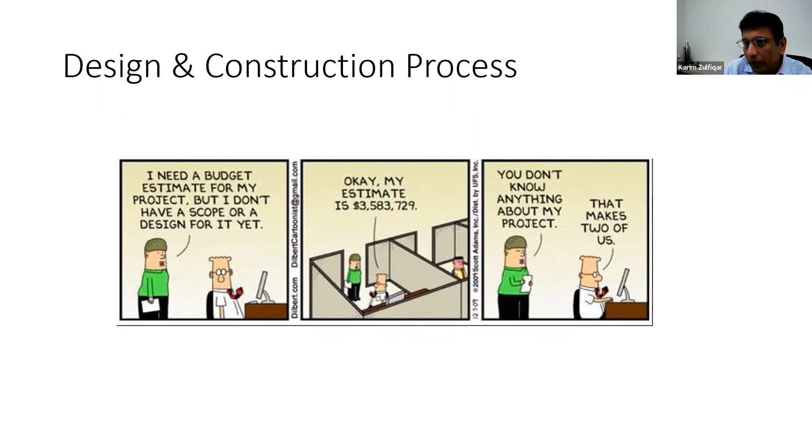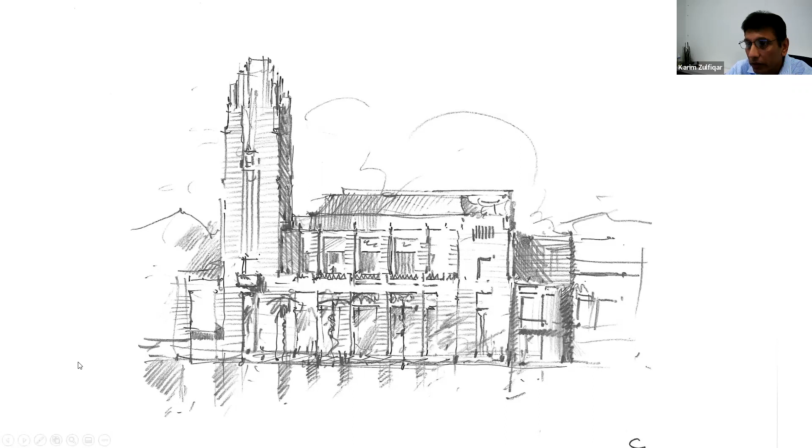So what we typically do is, at least at some level, somebody has to come up with the idea. You may be sitting with the owner and they say, hey, I need something which is this size, I want to look at this way, or this way. So for this one, you can see a sketch of a building, and of course it's very schematic. And you say, okay, how do you turn this into reality? If you go from this to this, there has to be a process. So going from the concept to the actual execution of the project, how that works.

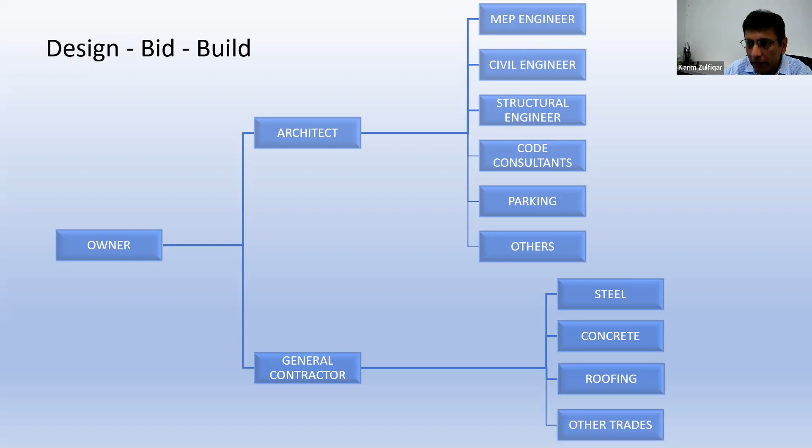Typically in our industry, in commercial construction, you will see two processes. One is what we call traditional design bid build, where typically the owner will hire an architect, and then the architect will hire a couple of engineers, code consultants, and the list goes on. And then the general contractor will have concrete, steel, roofing, and other trades, exterior walls, things like that.

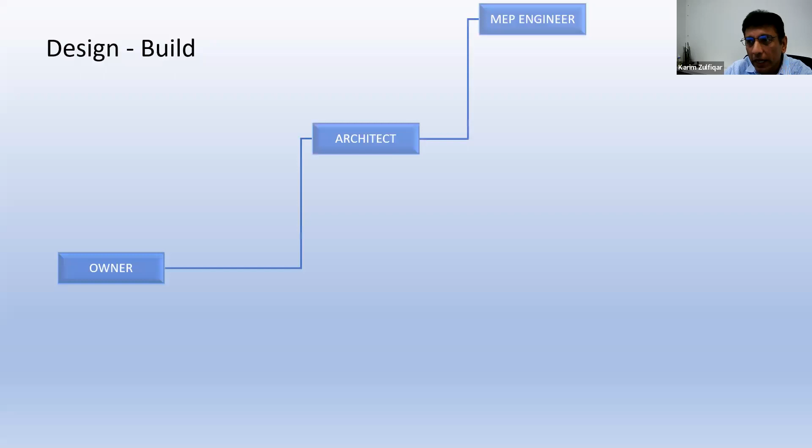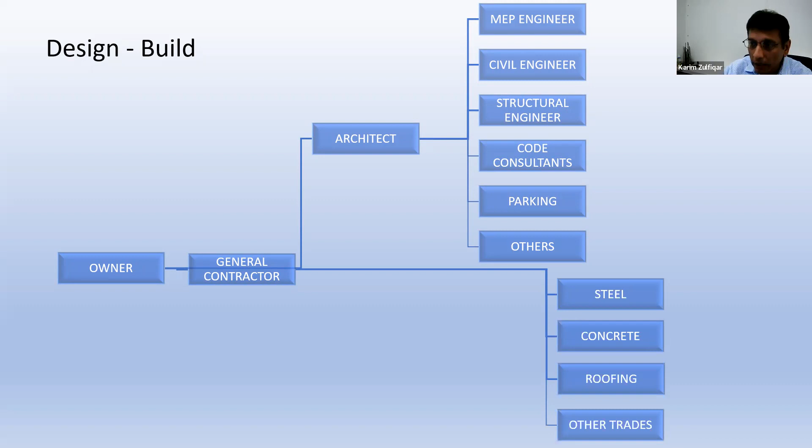The other system, which is getting more traction, is very common on the West Coast. We have done a bunch here in Houston too. Owners still have the same team members, but now the owner is only contracting through the general contractor, and all trades are still the same, but there's only one person responsible, the contracting firm. So there is no finger pointing. It doesn't work in all cases, but it works in most of the cases. So the contractor is responsible for hiring the engineers, architects, and their subconsultants or subcontractors.

So what does an architect do?

Just a joke, of course, we call them engineers without the math degree, but they do planning.

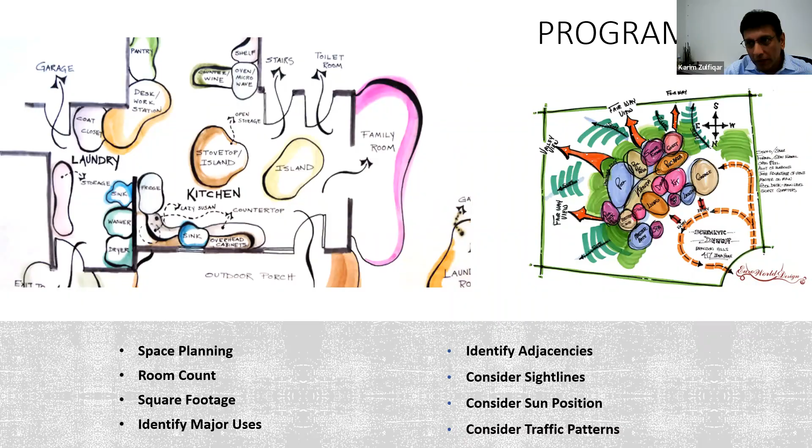So they do block diagrams. They look at the lighting, traffic patterns, what needs to be done. You can see that cartoon on the screen is kind of a residential area, but they provide those block diagrams. Then from there, they refine their drawings, create documents showing the rooms, general dimensions, and they create something conceptually.

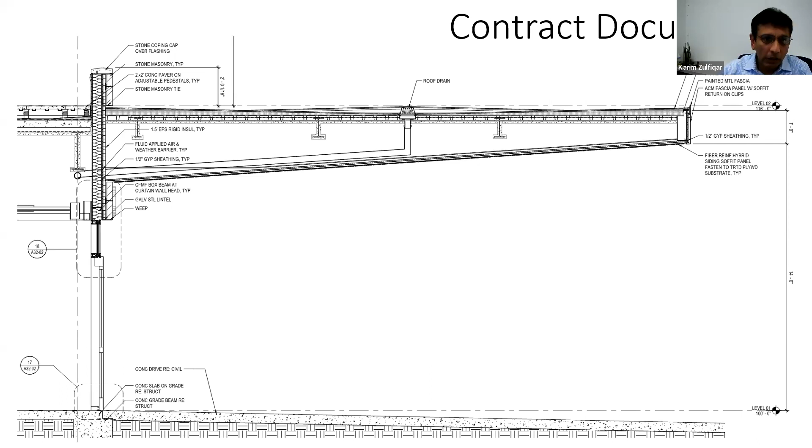I will not touch all the engineering, but of course there's mechanical, where you have to have the air conditioning, plumbing, electrical. You have to make sure that egress and the American Disability Act is followed, things like that. That's part of the architect's job, along with working with a code consultant and different engineering firms.

So if you can think of any force - gravity, earthquake, hurricane, blast, tornado, flooding - any natural disaster that you can think of, or any loads that you can think of, we have to make sure that if somebody is drawing something, it can withstand it.

And as a structural engineer, the only responsibility we have is public safety. So when we put our stamp on the drawing, the only thing we are responsible for is making sure that the building is safe. Whether the glass is broken during a major hurricane, or the owner wants you to change something because it's costing more, but it will compromise the safety of the folks, we don't do it. Technically, we have to report that.

So that's why we, as an engineering profession, are not fiduciaries, because we cannot - our interest is not the client. We don't hold the client's interest first. Public safety is the number one priority. So if the client fires us, that's fine. It doesn't happen often, but that's a possibility.

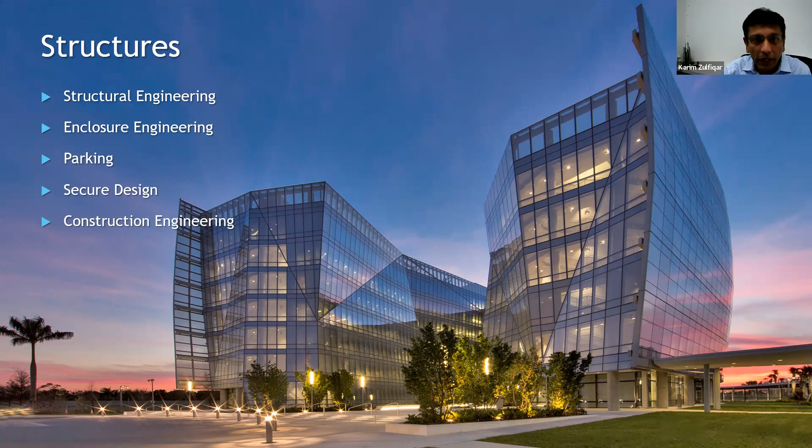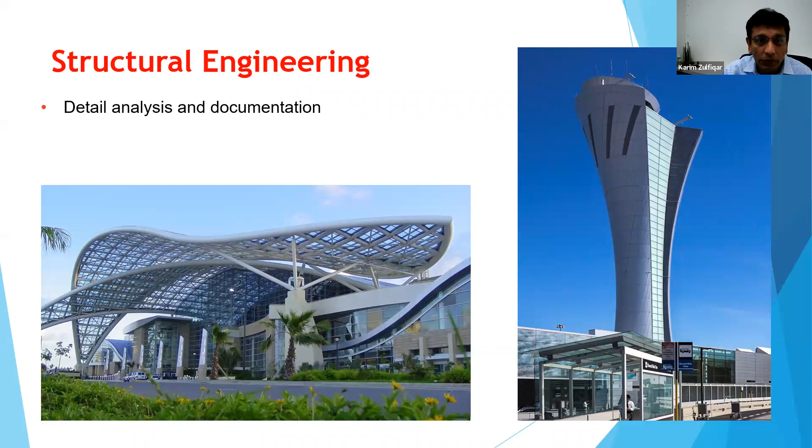So the idea is that you have to make sure it's standing, and the reason it's critical is because you don't want to have an air traffic control tower down after a seismic event, because that's where you need it to be functional - people are still in the building 24/7. So you have to make sure it's safe for the occupants.

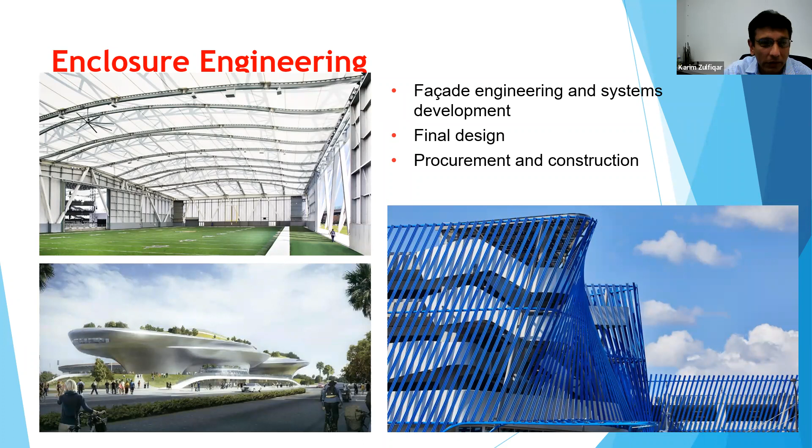We also do parking garages, so we have a group that does the parking design - aisles, all the controls and everything that's done. I don't want to go over the whole list, but this is part of the structure practice here.

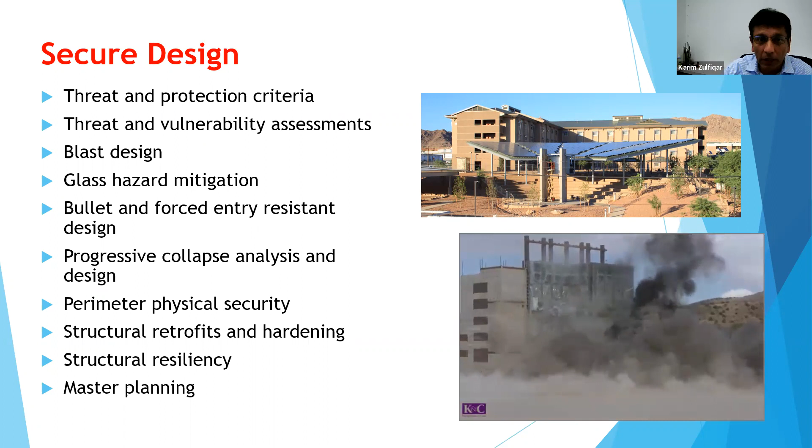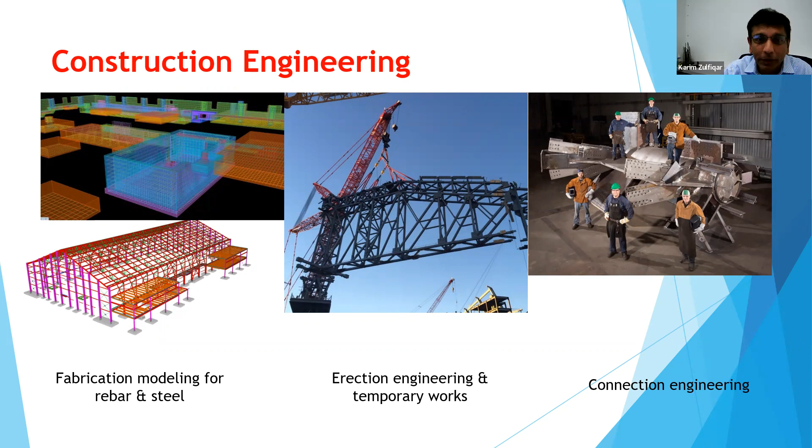We also do construction engineering, working with the contractor who builds that. The right-hand picture shows the connection of a truss in one of the stadiums we designed. Those connections can be huge and complicated, showing the scale and complexity in some of the stadiums you see these days. Everybody wants that—Dallas Cowboys was the extreme. Minute Maid was one we did and we thought that was pretty cool. Now it's like nothing; people keep stretching more and more.

Then we have the diagnostic practice. Once you build the structure, there's going to be maintenance—no building is designed to last forever, every building needs maintenance, and in some places you will have problems. We go out and do investigative work, do the repairs, and produce documents showing how to repair that, working with a contractor. We have a group that works on that.

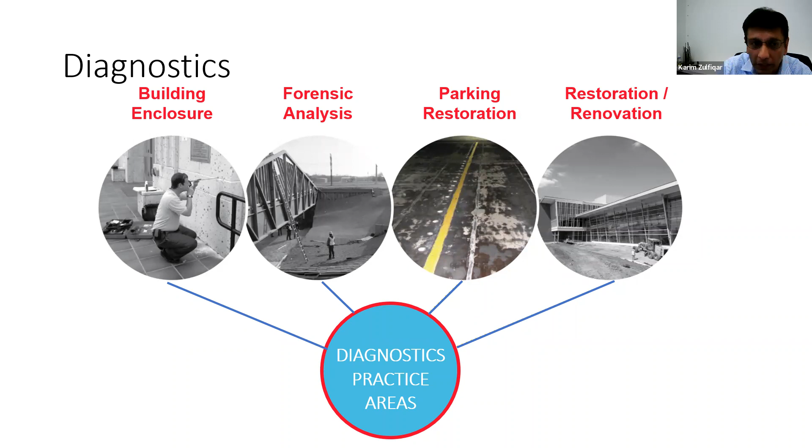We also support litigation efforts. So if somebody has defaulted on construction, we support the litigation efforts as well.

Where do we work? We work pretty much all over North America, South America, portions of Australia, the Middle East, and some in Europe. We have offices that now cover some of our international locations.

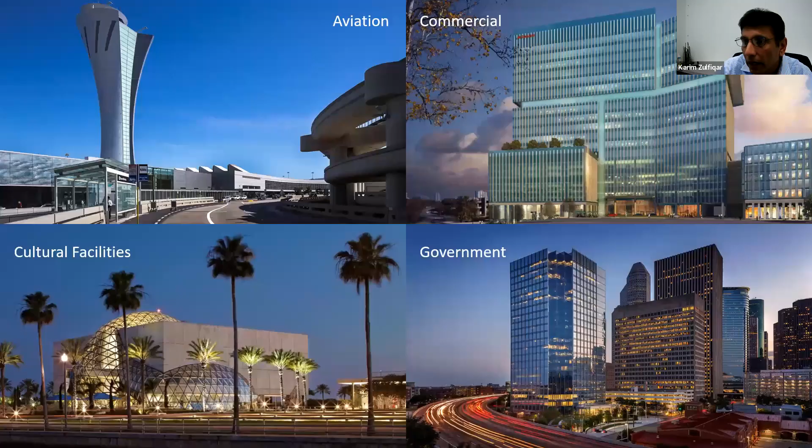What type of projects do we do? The top one is aviation, commercial, cultural facility, government projects—this is one of the projects I'll probably show at the end if there's time. Also healthcare, education, hospitality. We don't encourage gambling, but we design it if the client asks us to. We don't take any liability if you leave your credit card there.

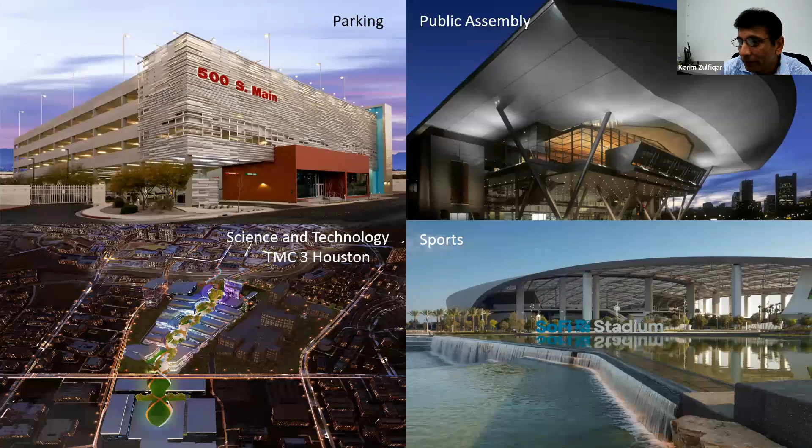Mixed use, parking garages, SoFi Stadium—you guys have seen that at the Super Bowl that just completed. That's one of the most expensive stadiums being built. It's getting more and more crazy these days as everybody's expectations get higher.

The one on the bottom left is the TMC3 that Caveh mentioned. This is a rendering—every single building is a different building. We have 3 buildings under construction right now, with the rest coming up, so we'll see which other projects we're able to do on that site. It's a massive site that's going to be a research hub and a major boost for Houston.

This is the structure model—that's what we do, and that's what gets us excited. We go from foundation all the way to the top. You don't normally see that because it's usually covered by exterior glass and ceiling, so it's usually only during construction that you see that.

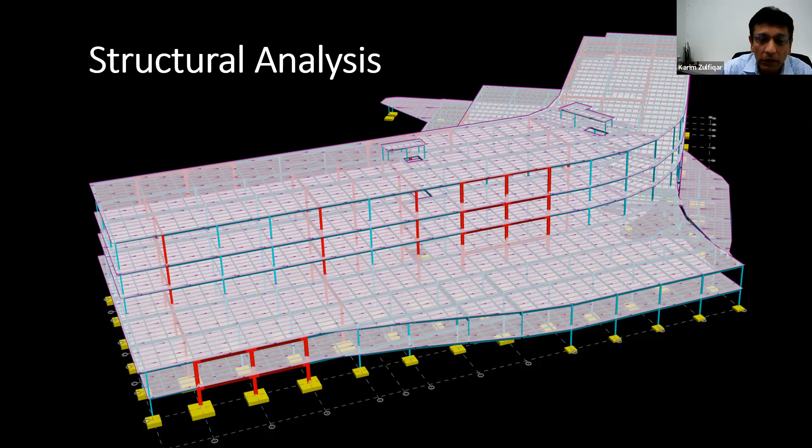We analyze the structure models—this is the Women and Children's Hospital in Phoenix, one of my projects just completed for Mercy Gilbert Hospital System. This one was in a moderate seismic zone, different from Houston, but this is just the concept of what we design.

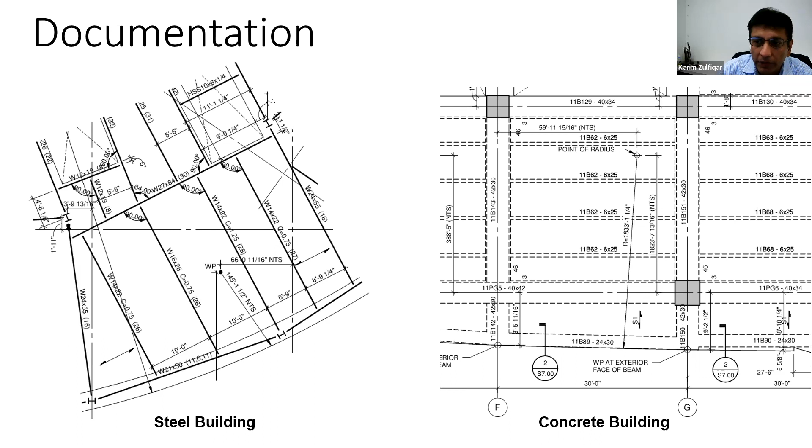We take this and produce drawings—right-hand side is the concrete, left-hand side is the steel building. We produce documents, and most people don't think about it, but every single mix of concrete is designed, with different ingredients for different commercial construction, so you get different varieties of concrete based on what you specify and what the building needs.

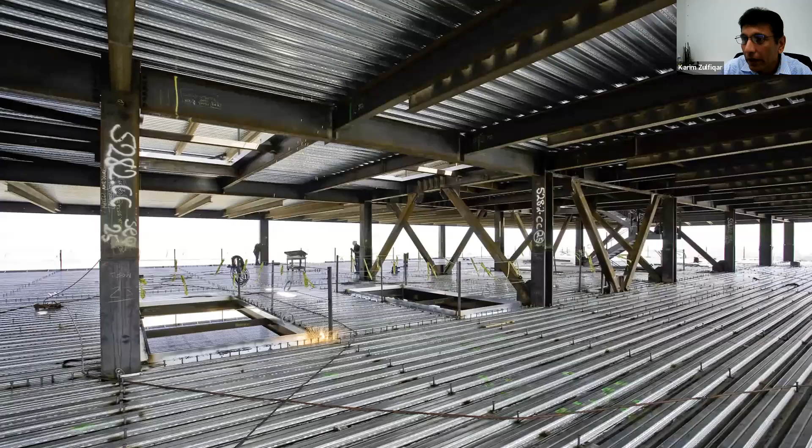Same on the right-hand side: every single rebar is designed, the spacing is designed, and that's what we do. On steel construction, these members—including connections, different braces, floors—every single bolt has to be designed to make sure it meets building code requirements and the required forces.

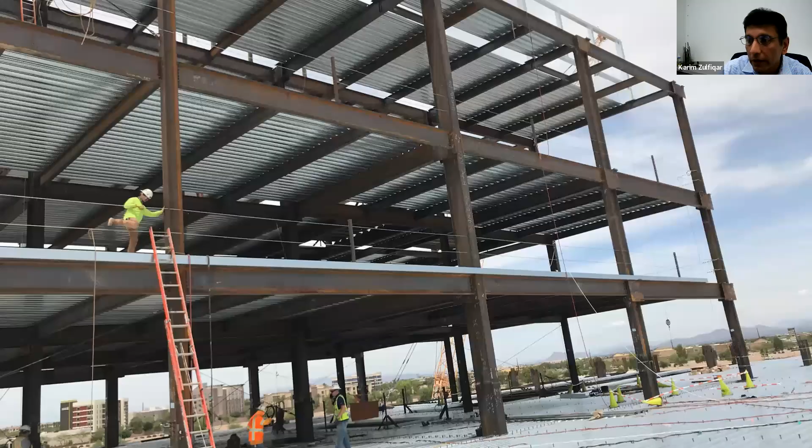So this is just a kind of a general overview of what structural engineering is and what type of work we do. So I will stop, pause for a minute and ask for a question.

I had a quick question. How do you normally get your projects? Or how does Walter P. Moore get projects? So we are 90 years old.

I was not here when we opened the office, but mostly it's based on relationship. We are one of these very fortunate firms that have these existing relationships, like Texas Medical Center. Our first project there was in the 1940s, and we are still there. If you drive in Texas Medical Center, more than 90% of the buildings are designed by us.

Same with major stadiums. The first retractable roof in Houston was the Houston Minute Maid Park. At that time it was Enron Field. When I was hired, I toured the building as part of the interview process. Now we have done so many retractable roofs.

I think it's based on the relationship and the expertise that we have in-house. One thing I always tell people is that there are people who will either under-promise and over-deliver, or over-promise and under-deliver. We don't do that. We just promise what we say we'll do. That's what gives us an edge to get the project, because it's about becoming a trusted advisor to clients, and we get most of our work from repeat clients.

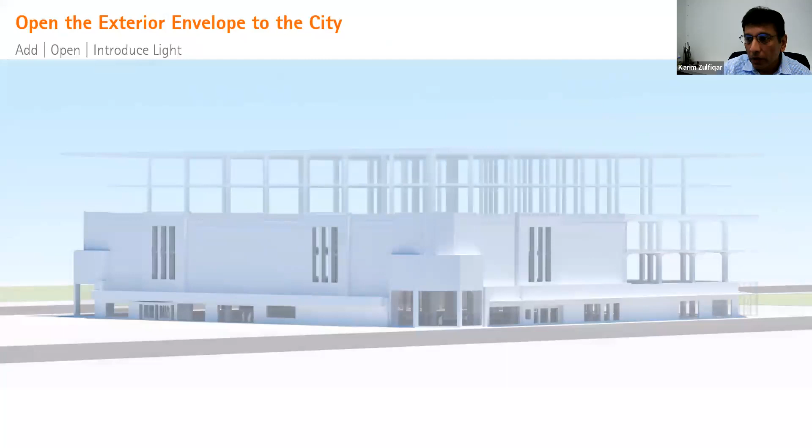So you try to work with the existing structure, you open it up as much as you can, and then you add structure. This is what the building model looked like, and it's very close to what we saw when we were there. So that's the first part—you create those physical building models and see how it works.

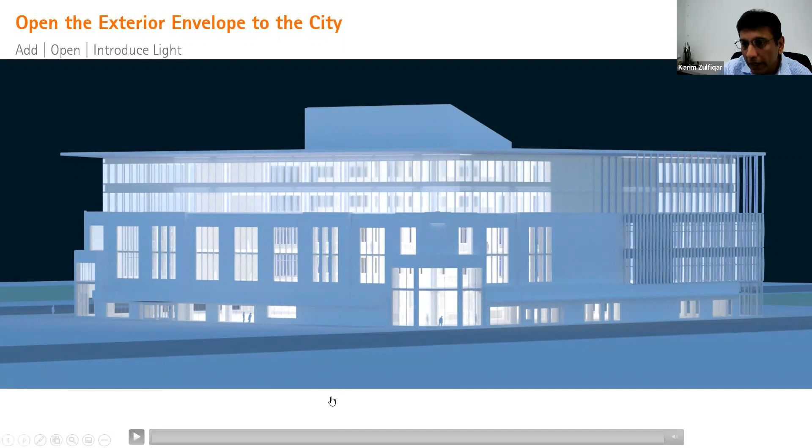This is during construction, but you can see some of the facade members used the same concept from their 1960s theme. They took some of these perforated, twisted metal panels and added them to the building—so how do you bring light to the building, which is a dungeon, right?

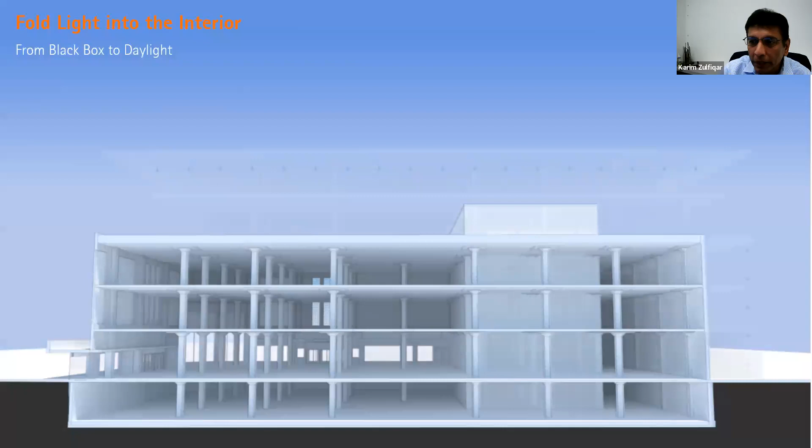So you see this one again, this is the animation. You have to cut the structure and build a light well so the building can get the light, so the building doesn't look like a dungeon. It's open, it's welcoming.

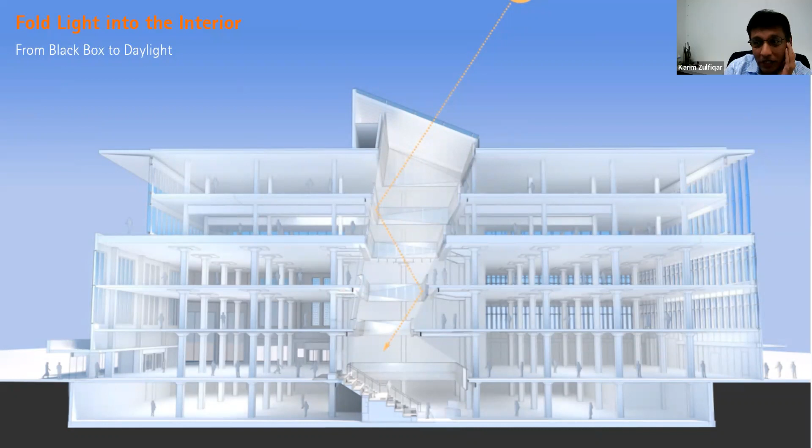That's where we created the structure, and it's a 1930s structure, so it's an old building, and modifying it was challenging. But you create that light well, and at the bottom you see those steps—those were the ones where we had our class. If you remember, we were in the conference room and everybody was sitting on these steps for one of our exercises.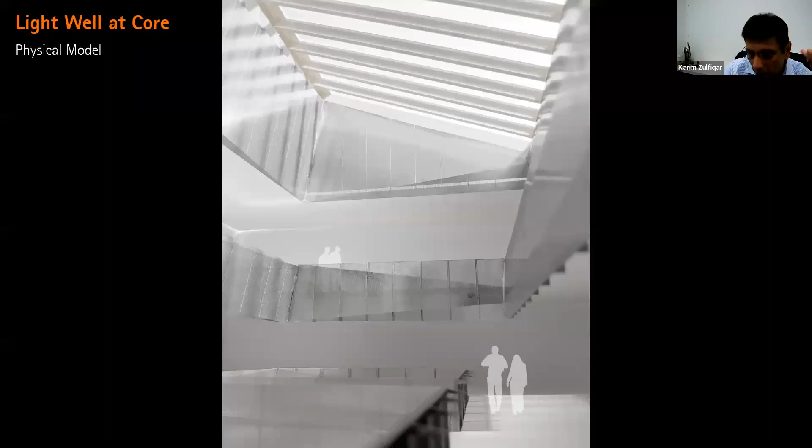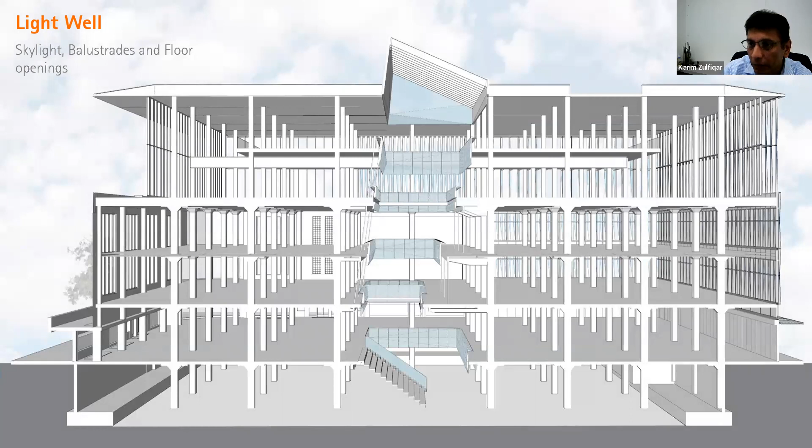We created these physical models just to see how much light is too much, taking that into consideration to make sure we knew what we were doing and weren't creating something adverse—especially in Houston weather, you don't want to create something where instead of lighting, you're getting heat. So again, same concept with the skylight, a new skylight that was installed on top.

In this picture, everything that's blue is the new structure. We repurposed the majority of the structure, but we had to cut some structure. You see some of these columns right here that we had to add, and you can see in the actual images how we had to add this to make it part of the design, but also to support the structure.

The other challenge was, all the blue—the top is all steel, the bottom is all concrete—but you have to make sure that this blue and this gray all look the same, even though this part was done in the 1930s and this part in 2020. It has to look like the same, because you want to create the same space. You don't want this to look like a patch job with everything exposed. So that was part of the challenge.

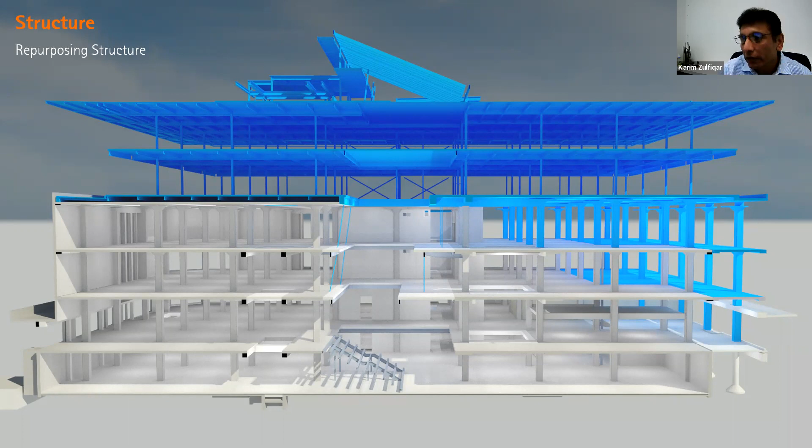So why didn't we demo and build a new one? We saved 3,100 tons of CO2—that was one of the reasons. You repurpose a building because you can make an impact on the environment. I can share more on this if people are interested, but this is why we tried to repurpose a building instead of building a new one.

And it creates character. ION is famous not because it's a new building—ION is famous because it's an old Sears building.

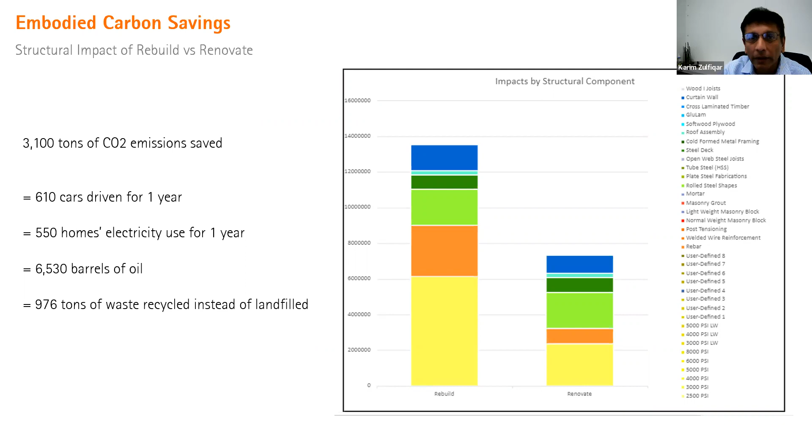So you have to cut the structure, create something. We go through every single corner to make sure we don't miss anything, because it has to stand the forces needed for the new building code and life safety. From the 1930s to now, the building codes changed a lot.

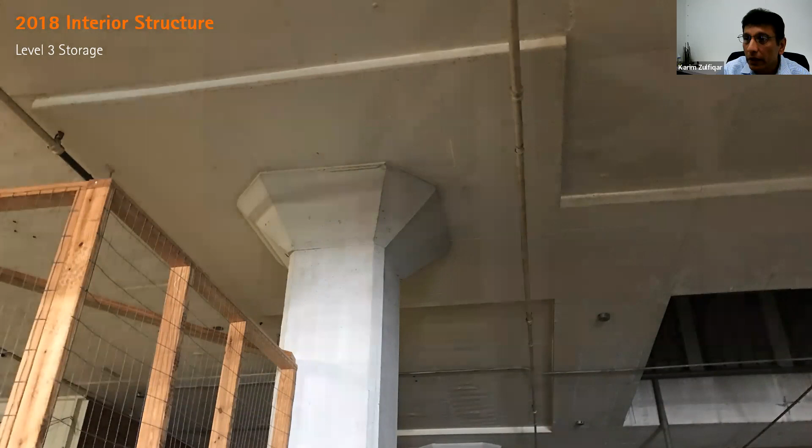So when we are looking at the stuff, we will see the cracking. Most of the time people will miss that, but we actually go there and look for issues. And when we removed the skin, this was the building.

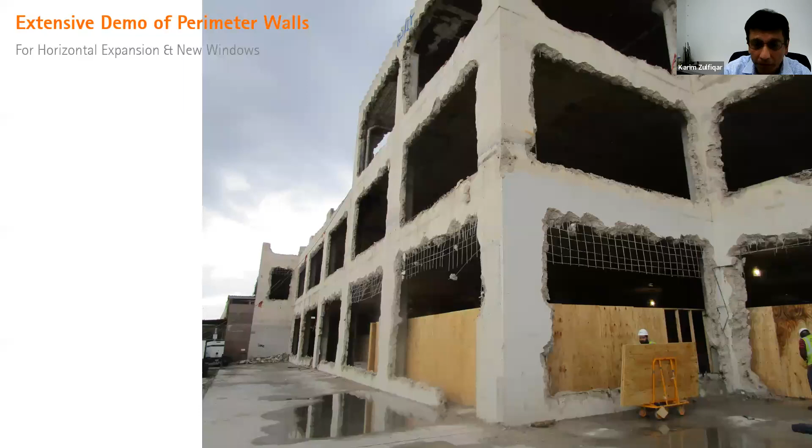You can see that it was a challenging part to make that work. We always tell people, if you can repurpose that, it probably costs about the same, but you can make an impact. And that's what Rice decided to do.

So we take the old drawings from the 1930s. And of course, these buildings, we are adding additional floors, so we have to strengthen the building to make sure it can not only withstand new code, but also support building on top of the existing building. We don't want the foundation sinking into the ground.

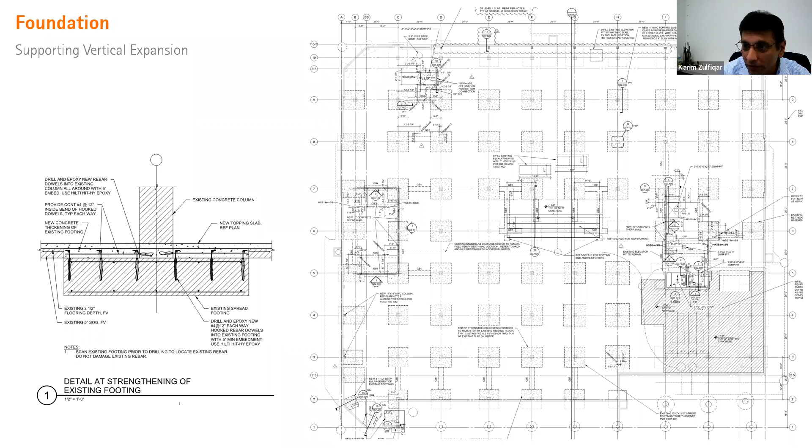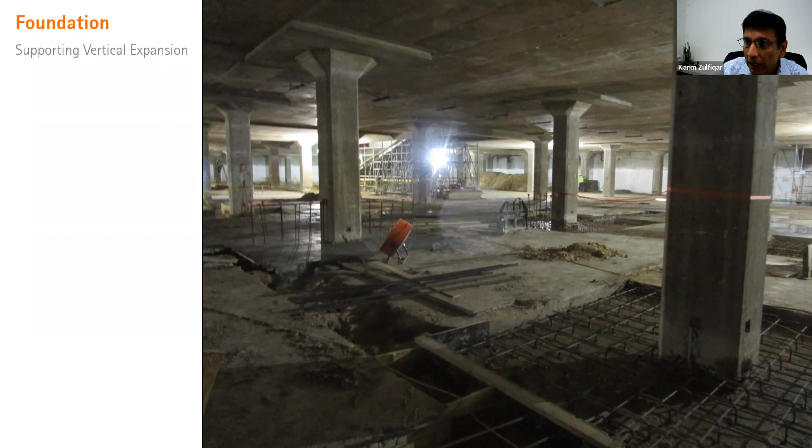So we look at these, we design the details, and then the construction happens. This is everything that was done. Every foundation was checked, every column was checked for the existing building to make sure it's safe.

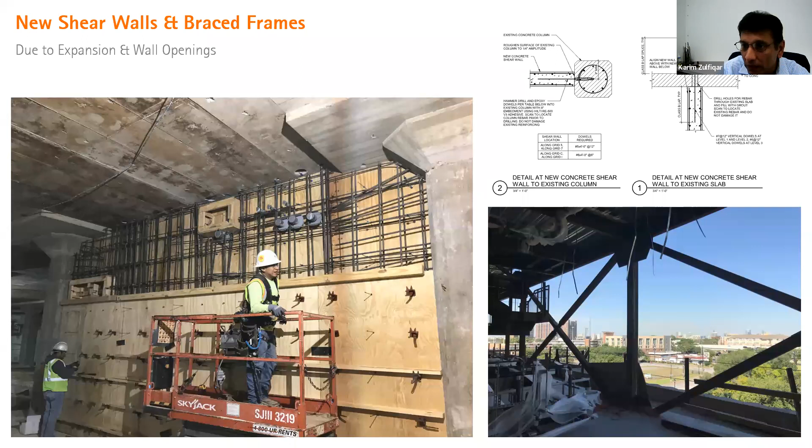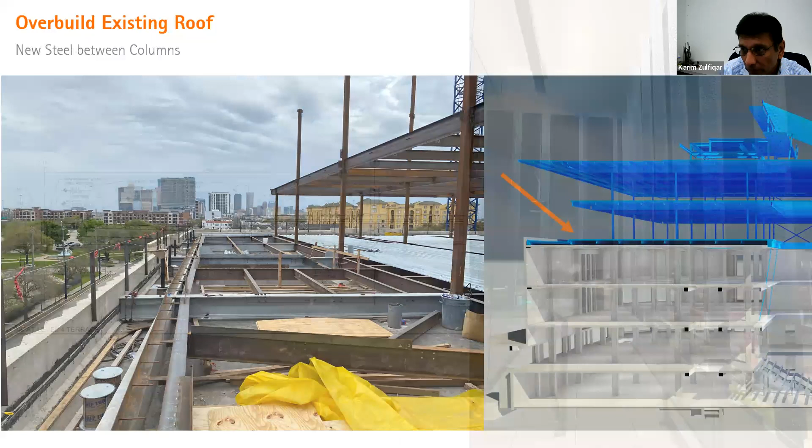And then some of these walkways, just some of the details we have to go through to make it work. This is what I was talking about before, the new portion, and on the left-hand side you see the existing building.

When you walk in that space, every concrete is exposed, right? So you have to make sure that the old and the new look about the same, so people don't see it as a patch. So it was done, of course we have to match the concrete texture to make sure it works.

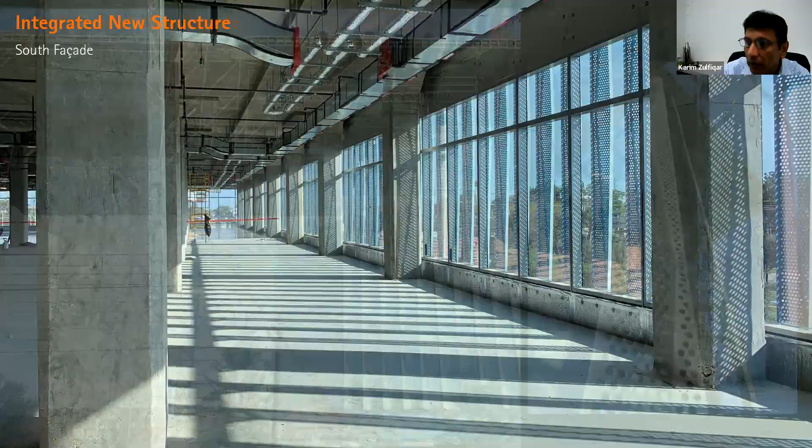This is during construction, they were installing the metal panels. This is that huge skylight that brings the light. Once we cut the structure, this is the skylight that was installed. You can see it's installed in a way that it brings the light, but not necessarily direct sun to the space below.

So that's why all these models were created, to make sure that you look at not only the light, but also the comfort level, so that people can use the space.

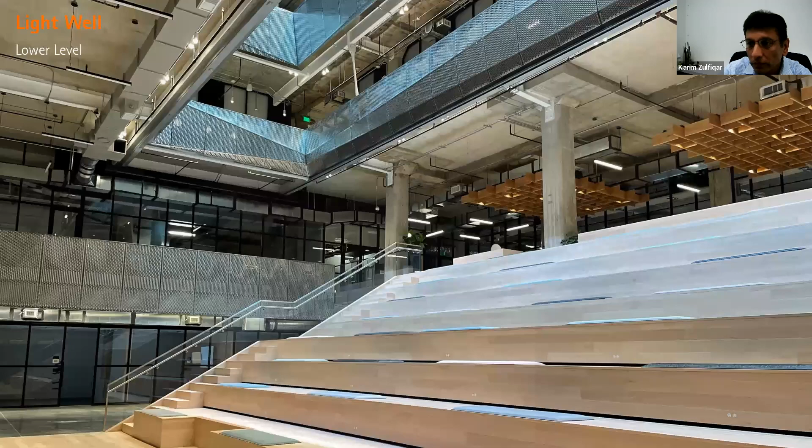So this is what it looks like. These are the columns. You can see, if you remember, these are the rods. These are the columns that support the edge, because we cut the center of the structure. But those were the support needed to make that building work.

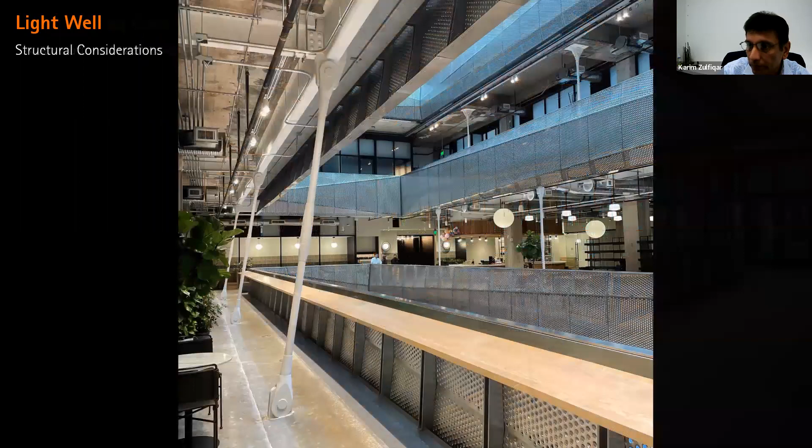Another view, again from the sides. So going from a 1930s building to this building, you can build this for about the same cost as a new building, but the reason it's famous is because it's an old Sears building. People love to use that building because it was repurposed.

So any question on that one?

Yeah, I have a question. Sorry for chiming in late, but are there any cost savings, or what is the comparison between this and starting from scratch?

I mean, you can save cost, because it depends on how good of a condition the existing building is. There were some challenges, but not everything was bad. You saw the pictures. There's a portion which requires significant strengthening and some foundation work, but you're still repurposing a bunch of stuff, so there is some cost saving.

But you have to look at the total cost, because not only is material cost a factor, but you're also saving a lot of schedule time, because you're not building half of the building. It's already there. So building versus strengthening, yeah, it's a time saving too.

So cost, environmental impact, initial cost, and then this space they can lease for a higher price. There's a lot of spaces available in downtown now, but if space is available in Ion, that's usually the first choice, just because of the nature of that building.

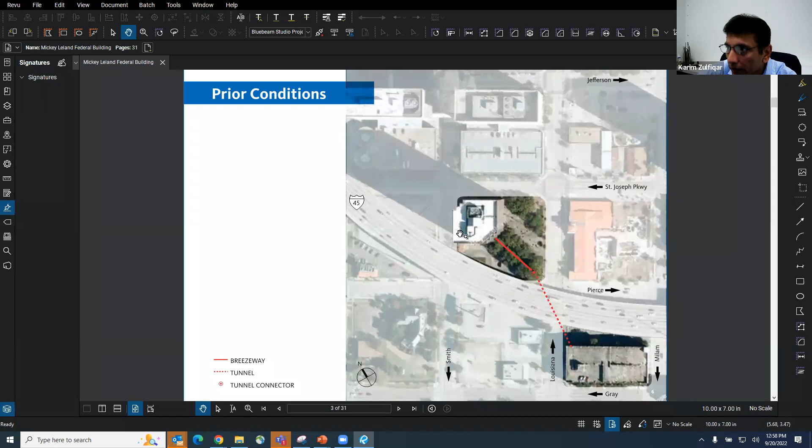And this is just the PDF. So this, if you guys remember, is Pierce Elevated. This is going to Dallas, I-45 North through downtown. The federal building is on one side, the parking garage on the other side. There's an underground tunnel, and then you come up and go through the breezeway. This is the building where the passport office, IRS, and everybody have their offices. So this is what the building looked like, a 1983 office building.

It was a precast construction, typical office building, nothing special about it. But the federal government bought that in 1986. And like I said, after the 1995 Oklahoma bombing, a lot of things have changed. So they decided in the early 2000s to modernize this building to make sure it can resist blast loading, resist wind loads, meet the new building code requirements, and look nice.

So they did a couple of different iterations, but having an '83 building, even in this case, was not easy to renovate because of how it was constructed. Some of the specifics I will skip because it's a federal building and we have to sign the NDA, so I don't want to end up in jail after this presentation. So I'll keep that vague, apologies in advance.

But this was not designed for modification, yet the modification the government wanted—we still wanted to give them something that's state of the art, still meets the security requirement, and still meets the building code.

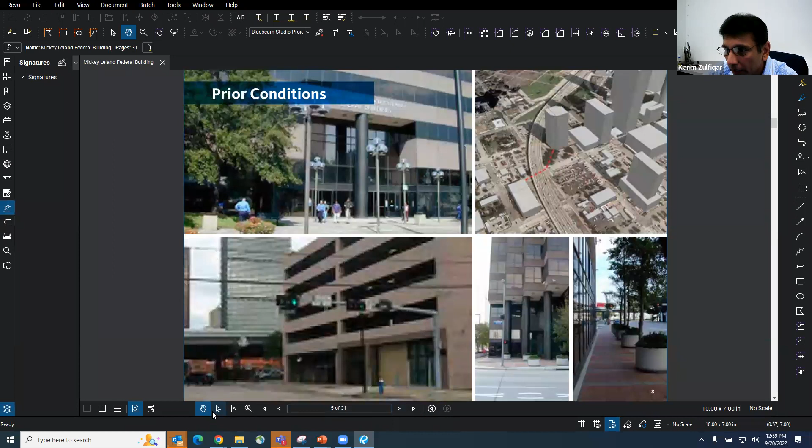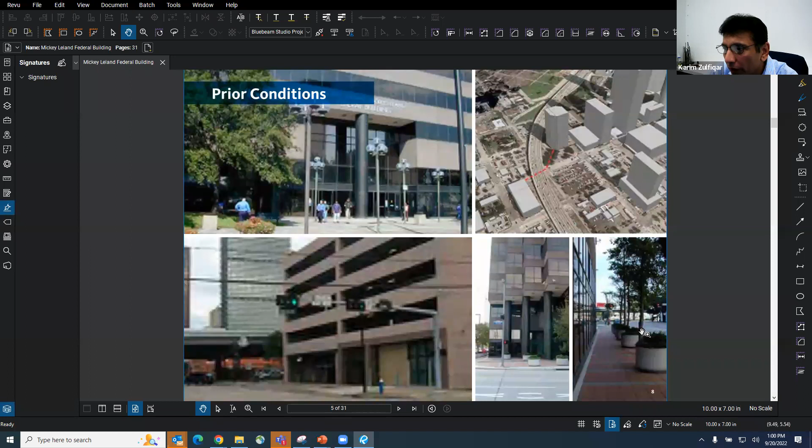So let's see, sorry, I thought it was a presentation. Let's go back. So this was the building before. Again, this is the garage schematic diagram, this is the garage right here. This was the lobby, a very small lobby space. People will—it looked crammed if anybody here went to the passport office before. This is one of the highly dense buildings, it has about 1,100 occupants. And the idea was that when we do this renovation, we were not supposed to relocate any of the tenants. They can still stay in the building, so that was the challenging part.

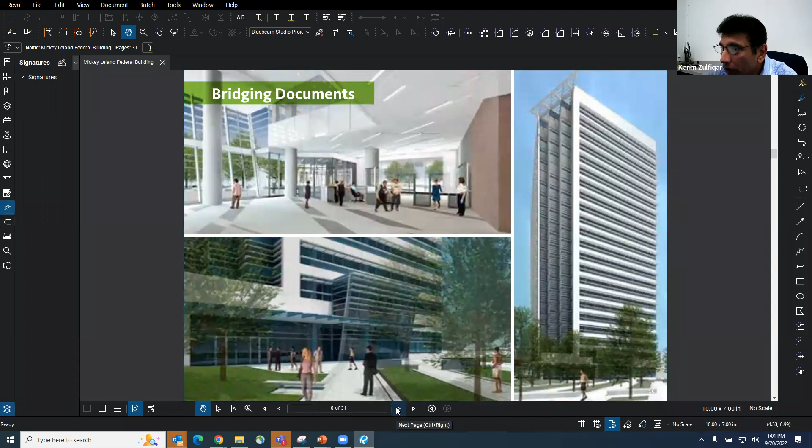So of course it needs to be energy efficient in addition to all this stuff, and the federal government wanted to change that building to this building. Of course we told them we are engineers, not magicians. So we told them this exact thing is not possible, but we can give you something slightly better than what you have. So we took that old building and proposed something like this.

This was with Gensler Architect in Houston. So we said, okay, this is the underground tunnel, people come in this nice glass breezeway, there's a green roof on top, you will have new cladding, and we will add security so it's protected against the threats the government wants to avoid. And you can have something like this. So they agreed and we did the analysis.

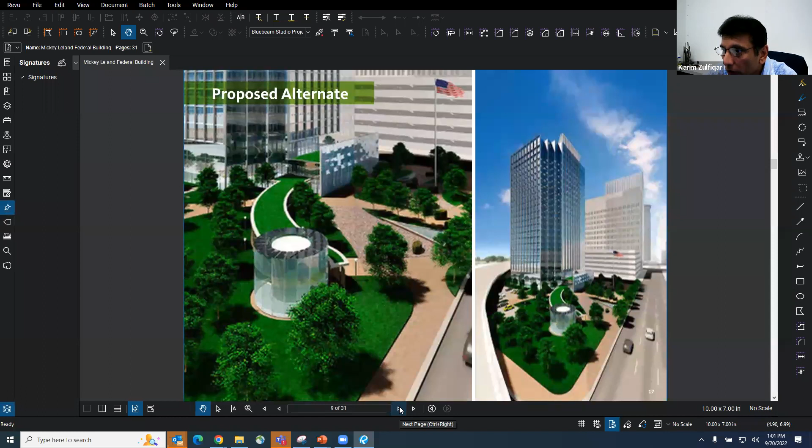The first thing was, can this building get this modification? And that's where the structural engineering part came in. So we worked with the design team, we created that concept model. This was the original footprint of the building, and we added a lobby space.

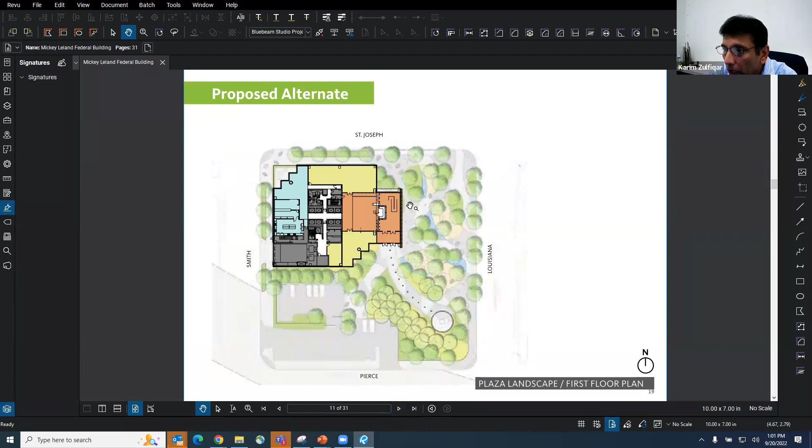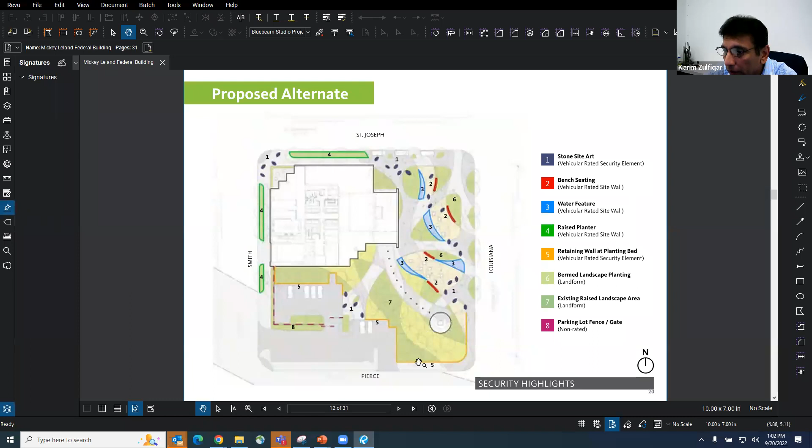Some of these areas are part of the green space, and I'll show you the actual picture, not just a rendering. These are the security barriers we added around the building, without going into specifics, to tackle different threat levels that the federal government required us to secure that building.

So this is again some rendering. This is what we propose as a lobby space in the rendering. So this was the structure part.

The building was not actually straight, it was slightly tilted. It was safe, I mean it's exaggerated, but we had to build a new skin which is straight on a building that was not straight.

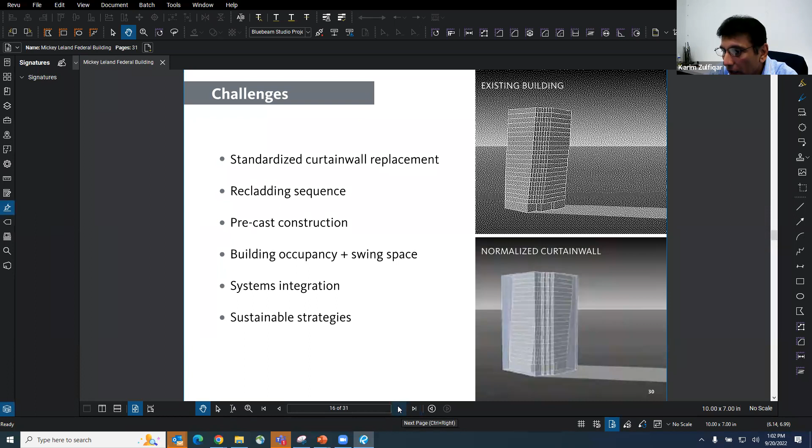This is the structural engineering part, which was the complicated one: making the building take the blast loading, take the new wind loads, and still meet the new building codes, built in '83 with no provisions or modification. So we came up with details.

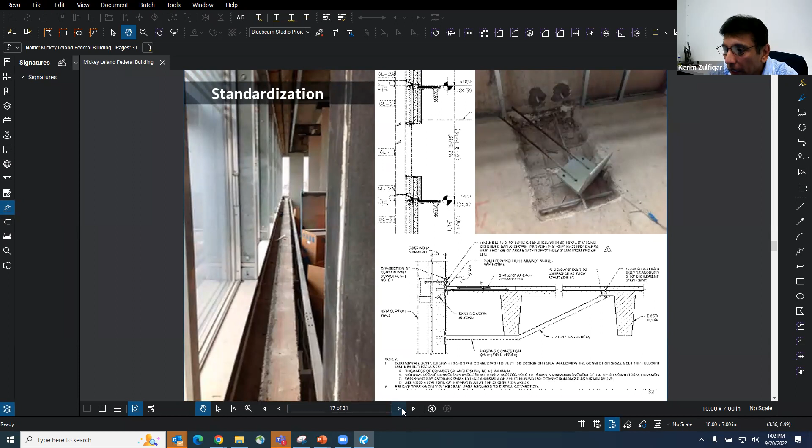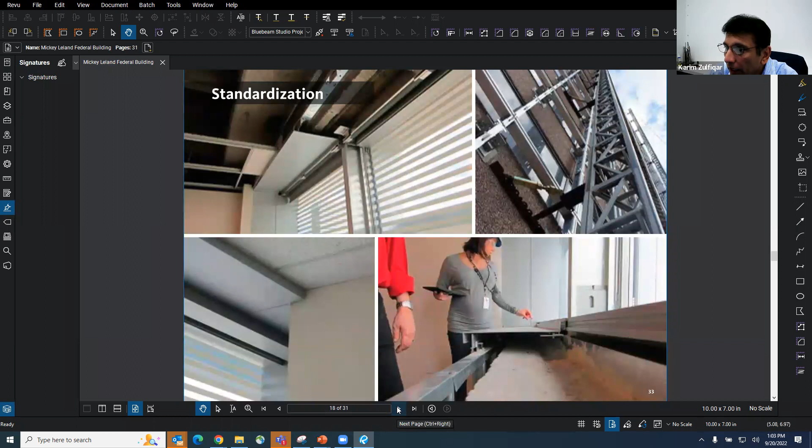This is one of our engineers on site, and I was there because it's downtown, so I was there multiple times during construction, because especially this corner is the reason I have gray hair. It took most of the time because it was complicated to design, since the nature of the building wasn't there to modify, but we were able to design that.

Again, some of these details required us to chip existing portions of the concrete in a way that we don't impact the occupants within the building, because this was a fully occupied building during construction.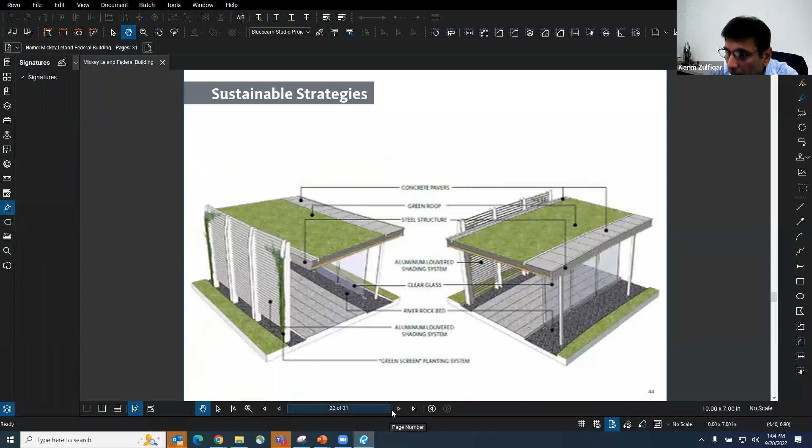So this is what the building looks like today. If you drive downtown, you'll see that on the corner. Again, state-of-the-art building skin, designed to resist the threat level that was given to us.

And these landscape features are part of the security barrier, to reduce or minimize that threat level that the federal government wanted to achieve.

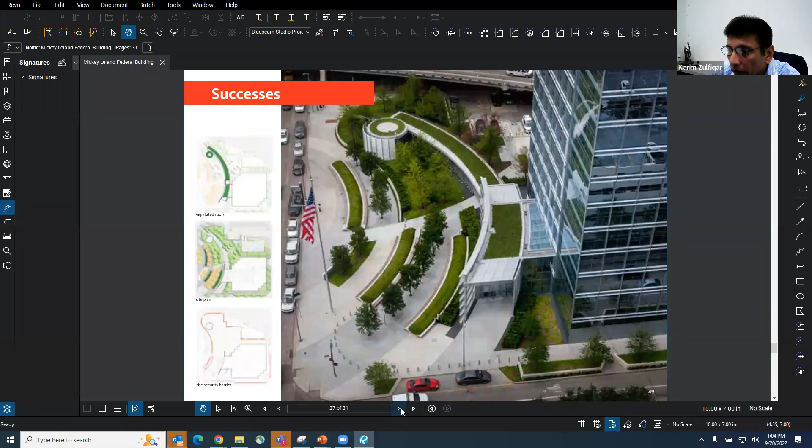And across from there in the garage, we added solar panels, and the solar panel wiring traveled through the tunnel. The building gets part of its electricity from these solar panels.

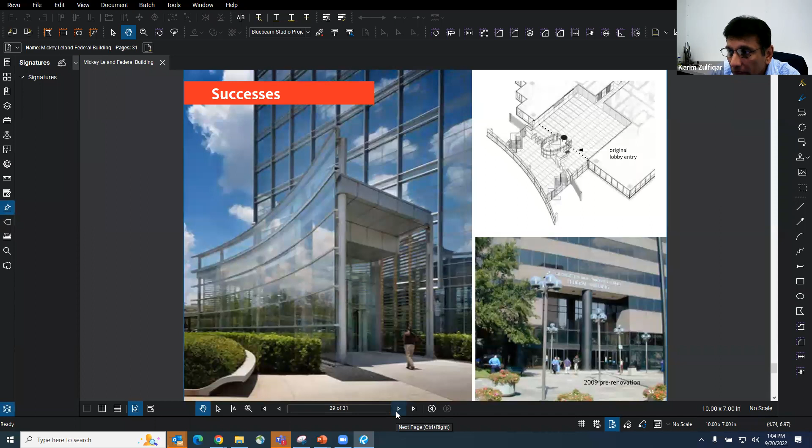This is the extended lobby space, and you can see the before and after picture. This is the breezeway, again creating something welcoming for people coming from the tunnel. And this is what the lobby looks like.

This wall right here involved a lot of designers, especially minority architects, who came up with different designs for the lobby space. So this is what the finished lobby looks like.

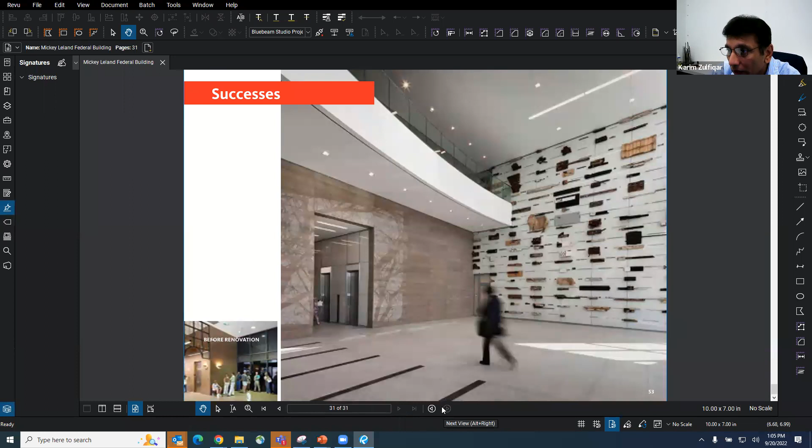Sorry, this was a very fast pace because I know we're out of time, but any questions on this one?

No, Karim, I was just making the comment in the chat box that it's nice that when you're designing these, quote unquote, barriers, they're still designed to be a welcoming design component, not just a wall, right? So it still performs its function as a barrier, but while it's not protecting against something happening, it's something people can use, which is wonderful.

Thank you. Any other questions?